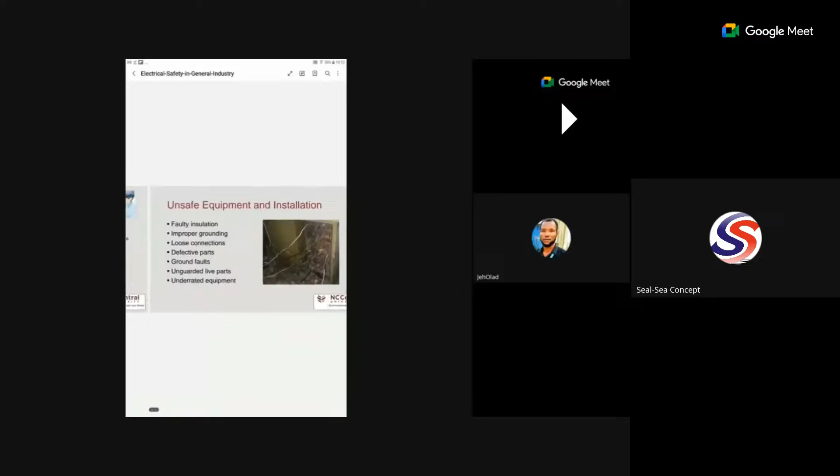I don't like telling people my profile, but if there's so much interest, you can find out. So I've seen people who are electrically inclined among us, so that's fantastic, that will make the training easier for me. And if you are not an electrically grounded person, or you don't have a background in electrical, a lot of people that study electrical safety would think it's only for people that did electrical, and that would be a wrong mindset.

When it comes to industrial safety, it is all encompassing. Industrial safety affects you whether you are working in a particular department or another department. As much as you gain access to the factory or the industry, you enter from the gates, all hazards that are present are also yours. So you can prevent them, guide yourself against them, and you can also mistakenly, innocently, or ignorantly expose yourself to those hazards. And that is why you need to have the knowledge of the dangers around.

You need to have a sound understanding of things that could go wrong at work, whether you are actually interacting directly with equipment or not. You need to really be aware.

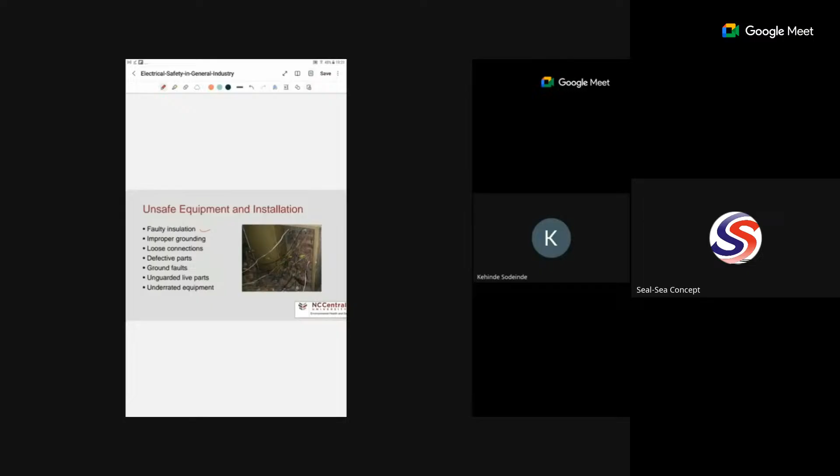Now, what do we call insulation? For the sake of those people that are not electrically grounded, insulation is those things that you see as rubber, you can call it rubber, that actually protects you from directly touching the conductor. So it is the insulation material that we refer to as insulator. So we are talking about faulty insulation.

If you have experienced this before, there are sometimes that if you forget that the plier you are using has already had a cut or a breach in its insulation, you may actually receive a tingling feeling, a tingling sensation when you're working on electricity, just to bite you a little, and then you will see that is because you are using a faulty equipment.

Now, I also had another experience back then when we were supervising the Ibese cement plant, that's Dangote Ibese cement plant. I was so lucky that when they were building the Ibese cement plant in Ogun State, part of us as Dangote academy candidates were actually used to also supervise the installation of the electric motors and other electrical gadgets.

Now, if an electric motor is of a particular kilowatt rating, and you want to connect the earthing of that electric motor, there are some where you can connect the earthing cable to the body of the motor, and there are some where you can actually take the earthing cable to the ground based on the rating of the electric motor. At least anything from 50 kilowatts upward, you should be able to connect the earthing cable directly to the ground so that it can be saved.

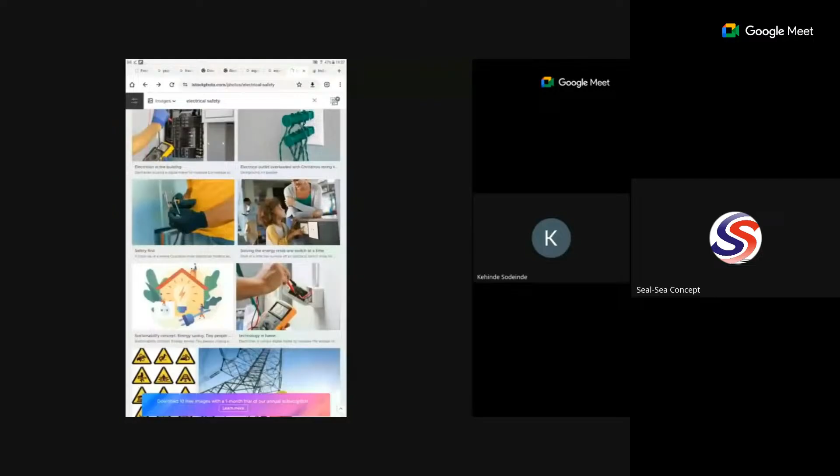There are so many other fantastic images you can see with guards being used. So when we move on, if I see any of those images, I will bring them up also. So we have unguarded or live parts - if the part is not guarded, the equipment definitely becomes...

Unsafe. Underrated equipment - what about underrated equipment? When you have some equipment, it happens a lot to people who believe they have experience - they look down on some equipment. You underrate them, thinking 'this one cannot kill me.' But it does happen. As small as your phone is and the voltage in your phone...

There are a lot of people who have not used phones safely before, plugging their phone while it is actually in use. Many lives have been lost due to that, and a lot of people have terrible stories to tell about that. Okay, so let's look at this.

What are the unsafe work environments? What makes the work environment unsafe? When you have flammable vapors, liquids or gases, the environment becomes unsafe because any little spark can result in explosion, can result in a fire incident. When you have a corrosive atmosphere, that's an unsafe work environment. When you have wet and damp locations, as I've mentioned before, this is also...

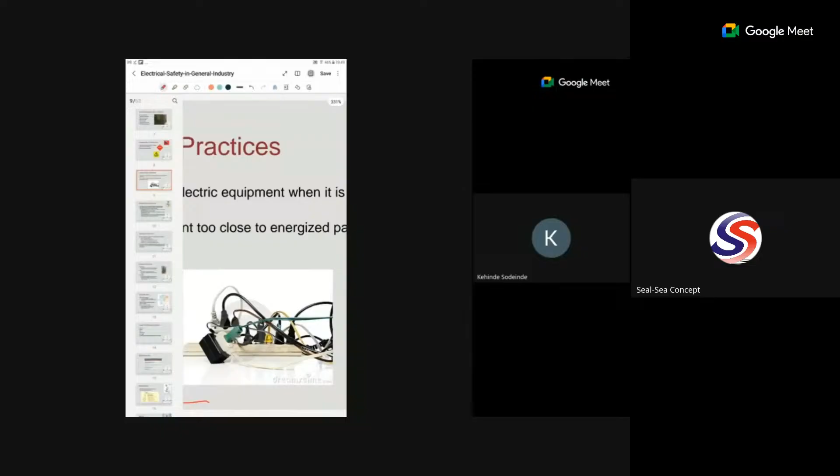Now, what happens when you have use of tools or equipment too close to energized parts? Okay, look at these connections, we're just using this as an example. Look at this overloading - that's what we mean by overloading circuits. How many of us actually still do connections like this? This can result in anything going wrong if you go to bed with this. Also in plants, there are junctions that are usually being overloaded.

Now let me show you some images of line clearance. You see people working on it. Now what they are doing here - if you have worked on all these kinds of breakers in the company before, they will bring you to this breaker. They are probably tracing the reading or tracing the supply.

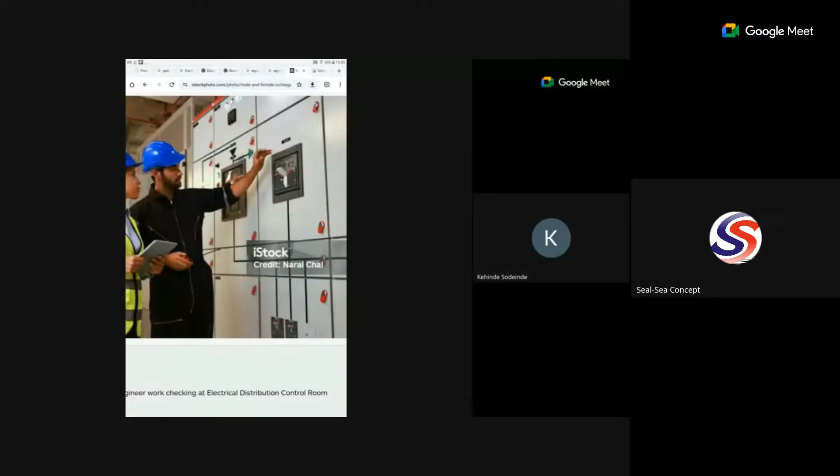They have to bring this down, because most industries - I don't know where you work, but you see this kind of breaker - all of them have a machine in the field that they actually supply. So if you are working on a particular machine and you have to take line clearance, you as a mechanical man or whatever your department may be, you have to follow the electrical man to this breaker. In your presence, you must take it down, and in your presence, you must put the line clearance. I'm going to talk about that when I'm talking about LOTO. So let's move on, because we do have a lot.

Okay, now let's look at the electrical safety model. What is the model for electrical safety? The model that you need to actually follow - we're talking about the pattern that you must follow for electrical safety. Now, what is the pattern?

The first thing is that you must learn to recognize hazards. It becomes a problem when you don't know that something is wrong. As an employee, whether you are an electrical worker, a mechanical worker, or irrespective of your work department, even if you work in a bank, when you see what is wrong, you should know what is wrong.

What is the definition of a hazard? A hazard is anything that poses a level of risk, okay, to either life, property, or environment. That is a hazard - anything that poses a level of risk, that poses threats either to life, to environment, or even to the equipment itself. So anything that has the potential to cause harm is a hazard in the industry.

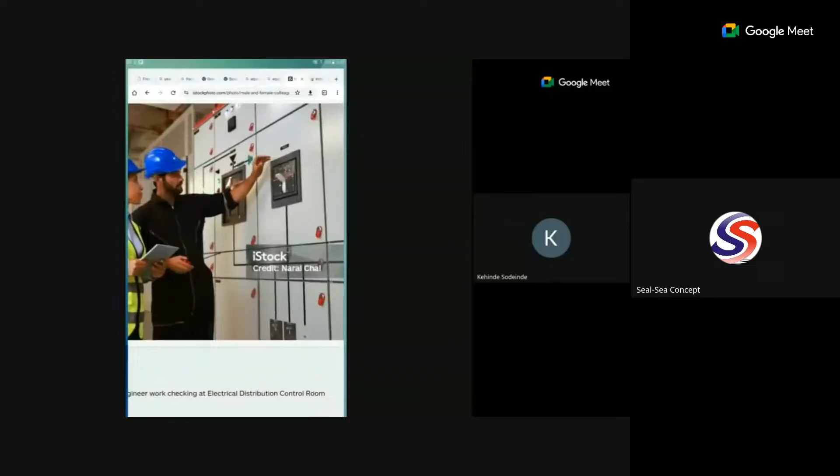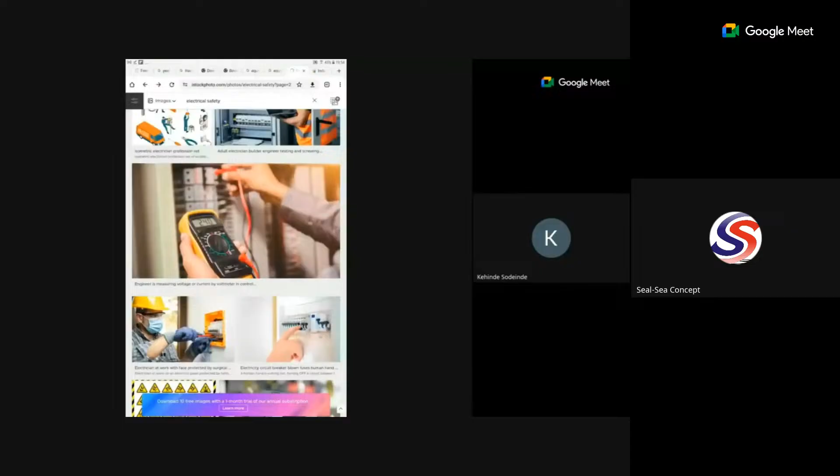When you see somebody working like this, let's see if she's using electrical shield protection. When you see somebody working on electrical equipment, perhaps twisting some conductors together, and is not putting on his gloves, it is very, very wrong. So look at this man here.

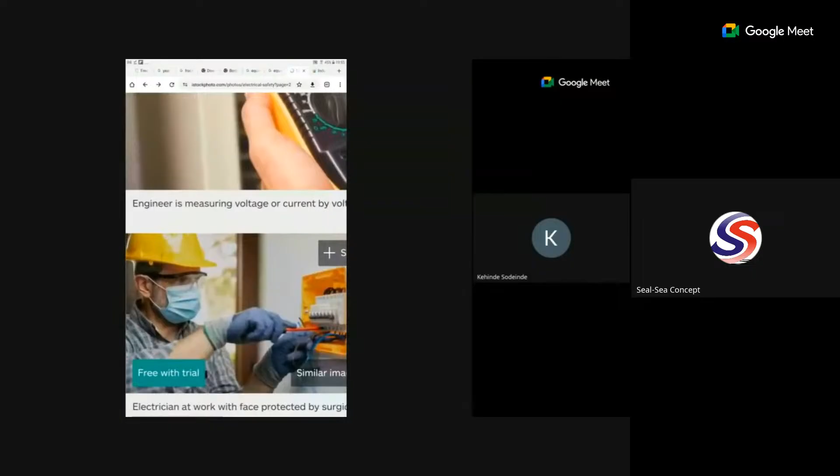That's a very good practice. Let me zoom it for you to actually see the image. It's a very good practice. You can see it's an electrical goggle protecting his eyes against hazards. He's putting on his helmet. That helmet might not be just due to mechanical impact.

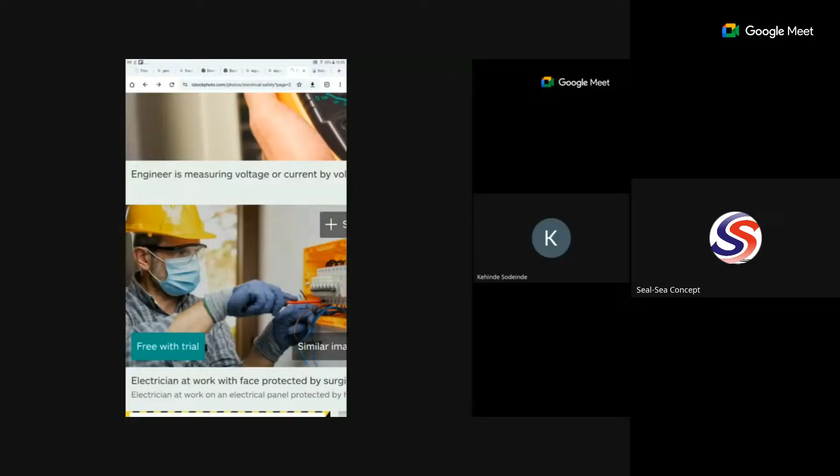There are times when people's heads get in connection with live cable when they are working, when they forget themselves. Especially at a particular joint box where you need to bend, be at a particular elevation or angle of depression to the equipment you are working on. You need to protect your head, because you can easily forget yourself. So you need to recognize hazards.

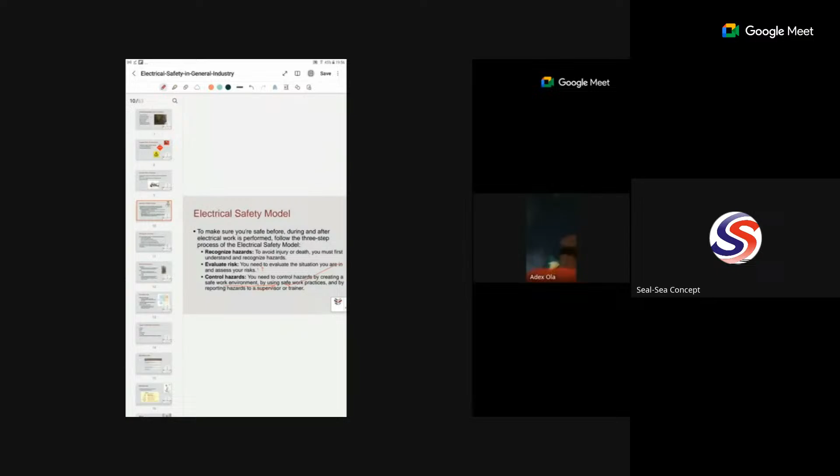The next thing you need to do as an employee is to evaluate the risk. This thing is dangerous - how dangerous is it? That is the evaluation of the risk. This thing that I'm doing is risky, let me now evaluate how risky it is. What could happen if I get entangled with this electrical conductor? Will it just be a shock that I receive? Will it be total electrocution? Will I actually suffer burns? All these things are evaluations that you need to do.

Now that we know the hazards and have evaluated the risk, the next thing is for us to control the hazards. There are so many things for us to do to control the hazards. There are policies - that's administrative control. There are cases of producing guards on machines, such that the parts of the machines that can expose the worker to electric shock, electric fault, or electric accident can actually be protected and covered. And then there are what we call PPE, which we'll look at in subsequent slides.

So let's look at the hazards, recognizing the hazards. What are the most frequent electrical hazards or injuries across industries? Let's look at this: contact with power lines - that's when you touch the power cable that is actually supplying a particular equipment.

I hope you are with me. Anyone in the house? Yes. All right, I'm with you, sir. But nothing is displaying - you are not seeing? I'm not seeing the screen, sir. Nothing is displaying. Oh, scroll it up or down. Is there anybody here that is actually seeing my screen? Who is seeing my screen here? I see, I'm seeing your screen. Now when you scroll it, you will see it. Can you see my screen? Yeah, the screen resolution is very small, the view is very small.

So we are looking at the frequent causes of electrical injury or death. The first one here is contact with power lines. I've mentioned that - when you are touching or come in contact with the power cable, that's the cable that is actually supplying a particular equipment.

Lack of ground fault protection. Sometimes there's what we call earthing. Let me show us on the whiteboard. You can have an equipment - if this is our machine, because the ground, that's the earth, is a good conductor of electricity, sometimes the body is actually connected with a cable, a conductor, buried in the ground. That's what we call earthing. So what happens when there are faults in this?

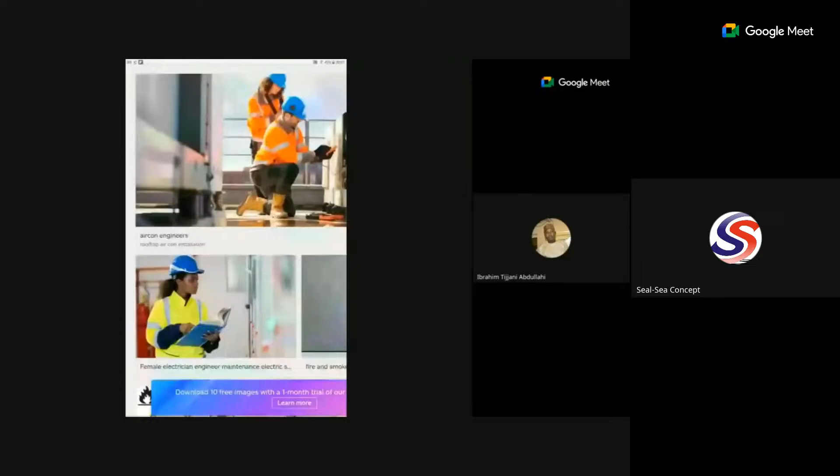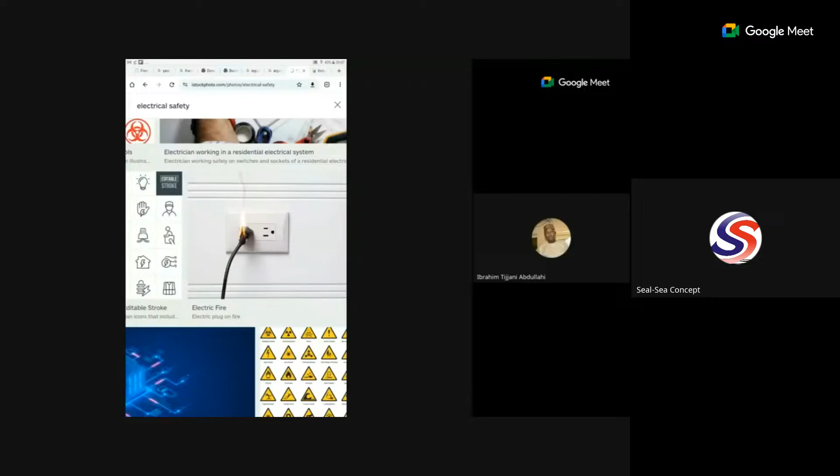Look at this, this might be due to arc flash. Let me give you a very close way for you to notice it. Sometimes when you operate your switch, when you press that switch, you see something like a whitish light discharge, like a spark of very whitish light. That is arcing. When the electric current flows through a different path other than the path that has been created for it, that is arcing. The electric current leaves its intended path and travels through the air from one conductor to another. Then that is what we call arcing. Let me demonstrate that for us to see.

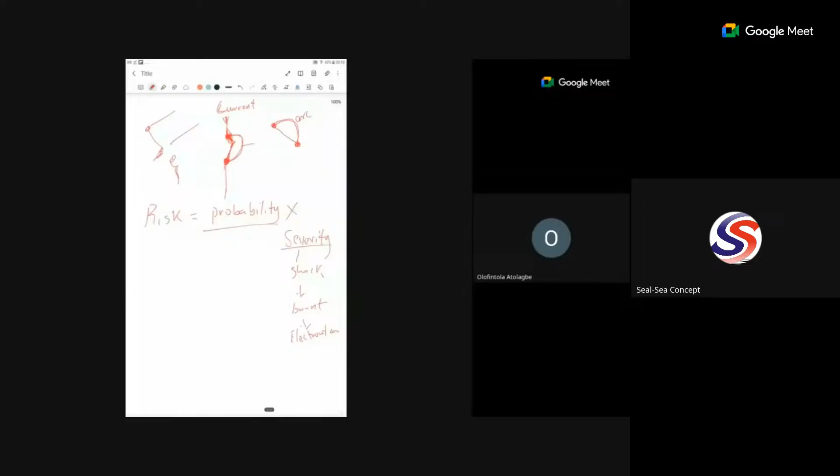Just the one I want to talk about is when we have a 7.5 kV compressor. Okay, 7.5, the rating. 3.5 kilowatts electric compressor. 3.5 kilowatts compressor. Okay.

So, do you have any other one? And 10 kilowatts. Okay, 10 kilowatts. Yes.

Now let's look at this as you want to perform maintenance. Which of them, if you want to perform maintenance, so we are looking at them being what? Live cable. So let me zoom this now. Where does it come? If the supply is on, where will your 3.5 kilowatt compressor fall on?

Under probability, what's the probability of electrical accident on it when it's energized? Looking at it, I think medium or high? It's medium. You have worked on it before. Yes, medium. What about the severity?

If eventually an electrical accident occurs on it, will the severity be low, medium, or high? What can happen? Medium. Why do you say medium? It cannot kill. Yes, it cannot kill, it's medium. The severity rating, okay, severity will be medium.

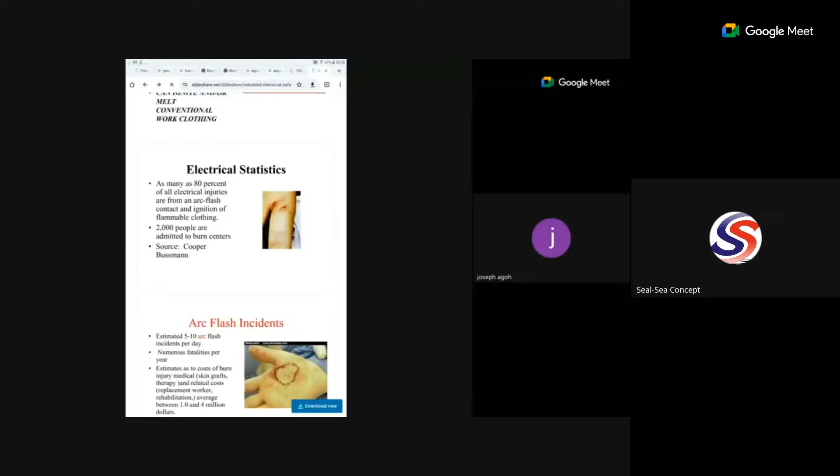Arc flash - how many of us have felt arc flash before? I need to bring up something on that arc flash. Let me think, I have something on arc flash. It's also very scary. You must have seen it if you have worked on a very loaded connection before, so you can see arc flash incidents.

Can you see on my screen what I'm displaying? Look at this, look at that. This is a result of an arc flash.

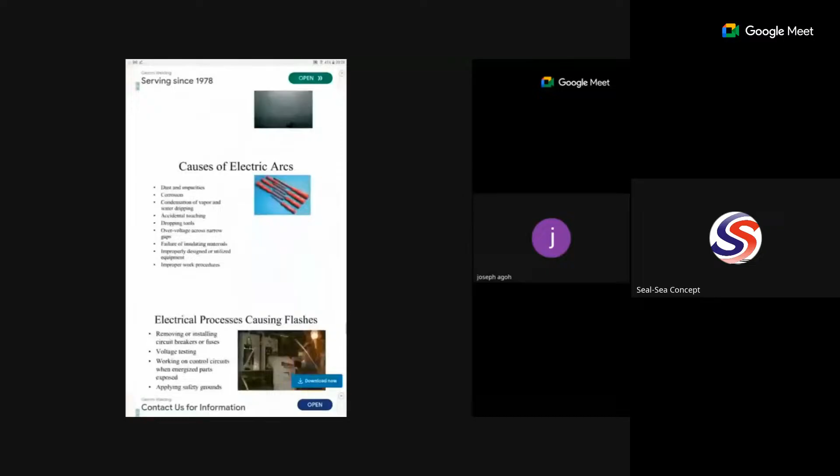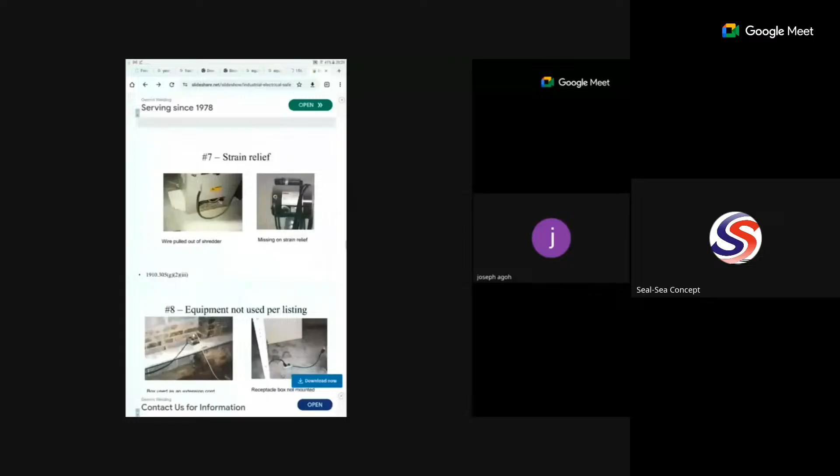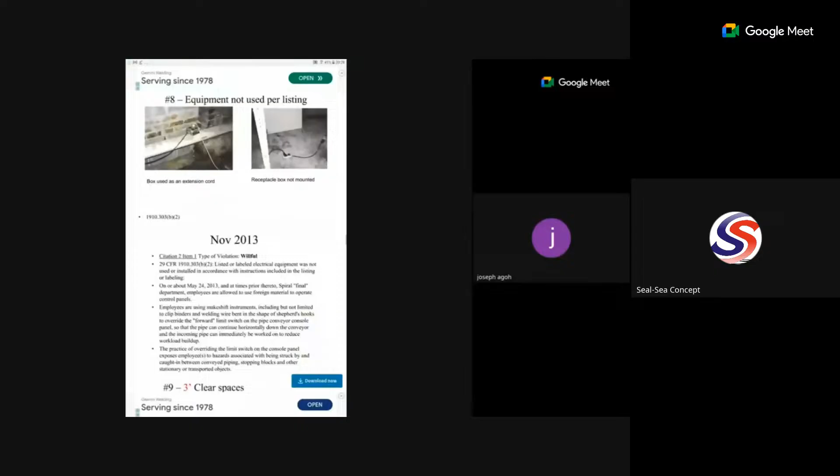You just see it come like an explosion, like a flash of light. It happens sometimes if you use the live wire to touch the neutral wire, maybe mistakenly they touch each other in your presence. I have witnessed all of them before. That's not fantastic.

Now let's mute please. The last but not the least is falls resulting from electrical injury or incidents. This happens a lot when you are doing electrical work that has to do with work at height. Falls, when somebody falls off due to electrical work, is a scary sight. It's not something to witness at all.

Now I want to show you the effect of electricity due to the measurement of the ampere rating. You can have a tingling sensation, just a tingling sensation. Many of us must have felt that before. It will be as if the electrical current is massaging your finger. The feeling may not travel beyond your finger.

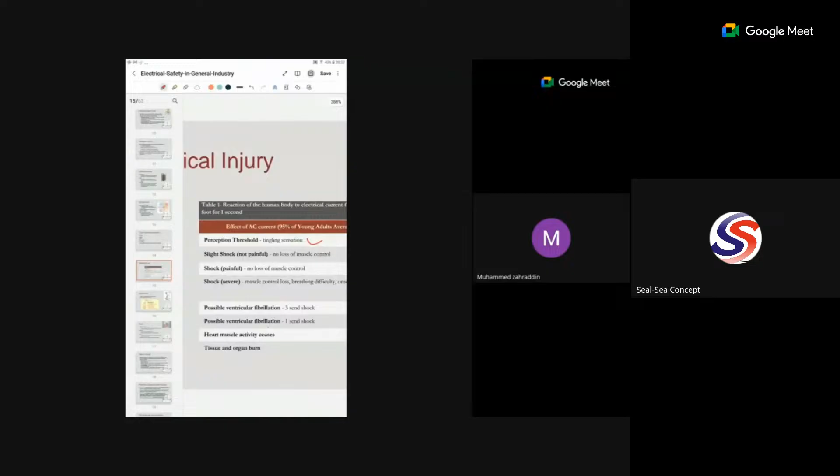So you can see this possible ventricular fibrillation - that's when you are exposed to about 0.1 ampere of current.

You can use this to know when working on equipment - like the first person who answered the question about differentiating 13 amps and 15 amps gave a brilliant answer: all equipment, when you take your time to check them, shows the current rating on them. With the knowledge of this class, you can see what you are open to if this should come in contact with you, or if you are exposed to it - what should you expect. That's what we are talking about.

You should know the one that gives just a tingling sensation, the one that gives slight shock, the one that gives a very big shock - painful, severe shock, possible ventricular fibrillation, possible heart muscle activity ceases - ceasing of the heart, you should know about that. That's the one of 0.5 ampere rating, and tissue and organ burn is the one of 1.5 ampere. So when you look at the current rating, you should know the extent of danger that could occur to you.